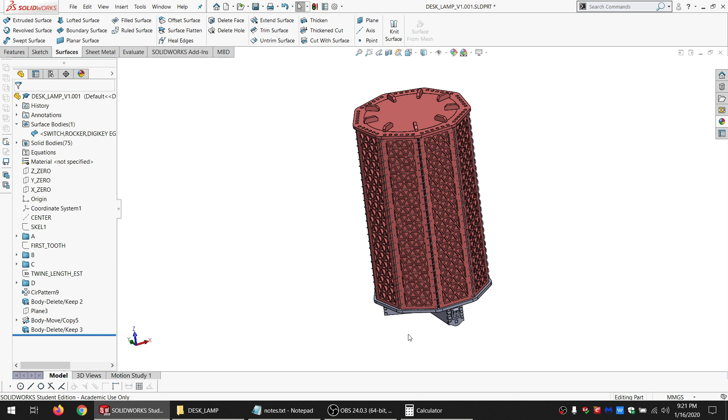Okay, back to it. Didn't do much since the last recording. I did do one minor thing: I went to the source file for the switch and added a body surface that's the size of the recommended cutout.

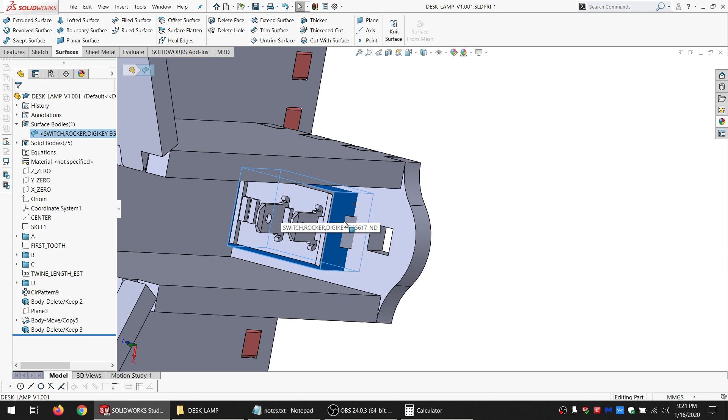So I'm going to use that to make the cutout for the switch. Just going to convert the two on the sides, and then I can draw on the other two because it's hard to actually see those other two.

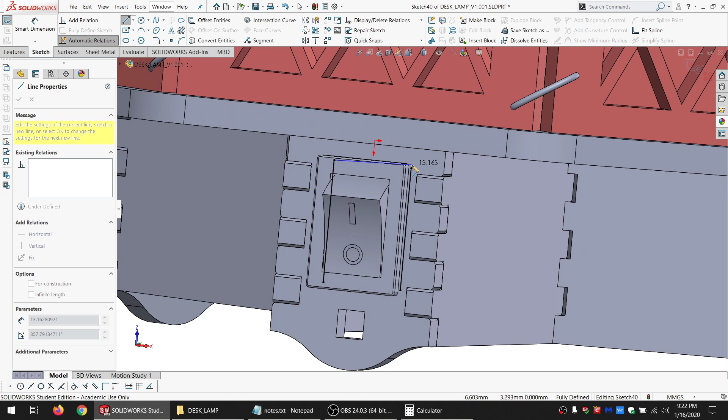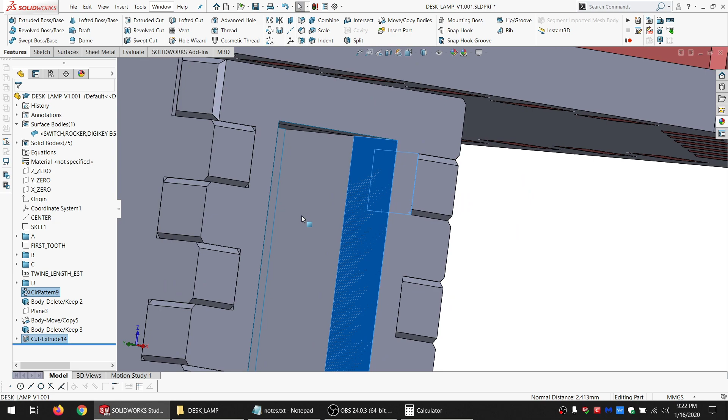Alright, since it's kind of a small spot, just want to confirm that there's at least some material left over here. So, a little bit under what I'd ideally like, but I think it should be okay given the location.

All the weight is going to be basically on these two. These are more for locking it together, so I'm not too concerned about that. I think it should hold. And I'll get rid of that body because I don't need it anymore.

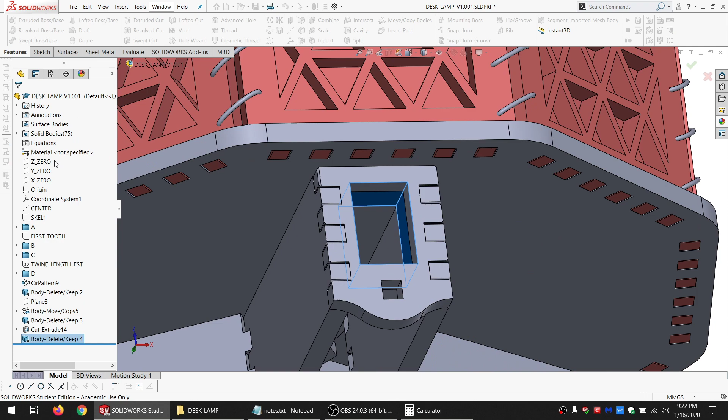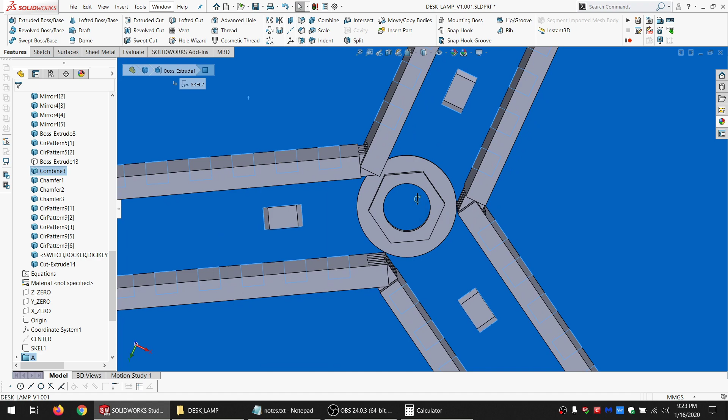Alright, so I don't remember if I ever made a hole for this to come through. I don't think I did. Yeah, there's no hole there. So go ahead and put a hole through.

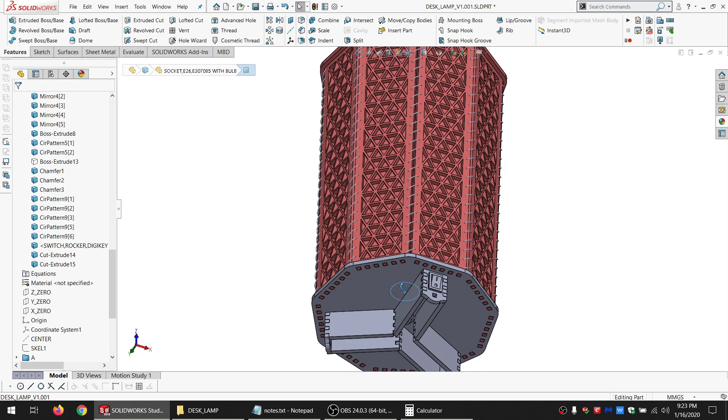And then what else do we need? So we need power to come in.

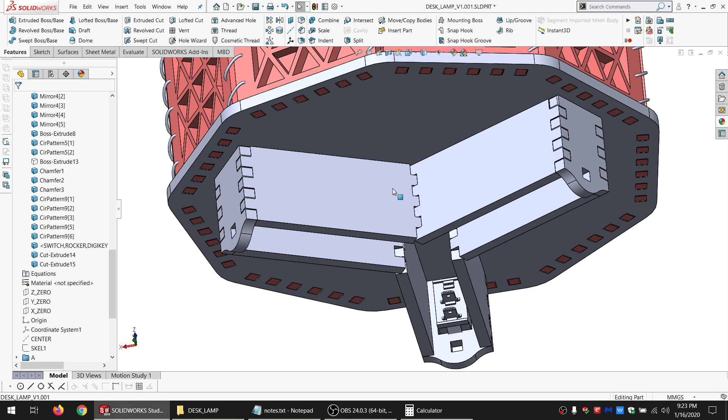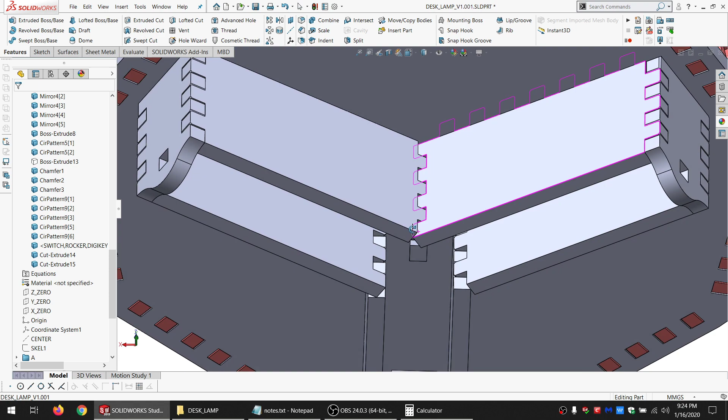I was thinking if it was like the power cord I had before, it had two separate leads that could have been divided—I could have made one hole here, one hole there, and made it symmetrical. But a lot of power cords are basically one outer covering with two covered wires inside of it, and dividing that up before it goes in is not ideal. It wouldn't look very good and kind of dangerous. Not really dangerous, but it would look dangerous.

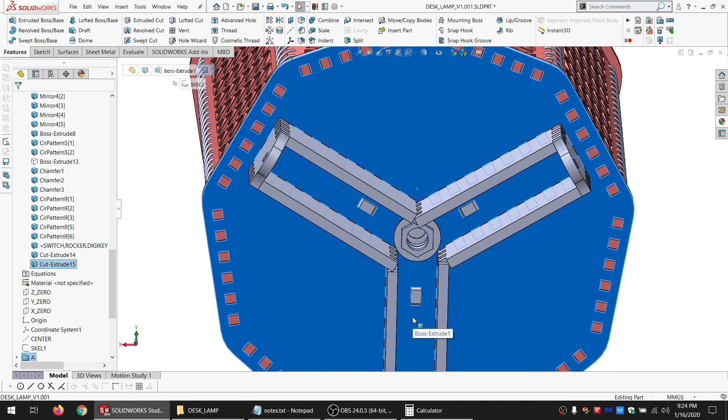So that means I need to think of something else. I could either put it in through here and route it back down, but that wouldn't make a whole lot of sense considering the setup here. Or put it in one of the end pieces, but then it's very far from symmetrical. So as much as I don't really like to do it, I think I'm going to put it right here. It'll be a little bit off of symmetrical, but it'll still be good enough.

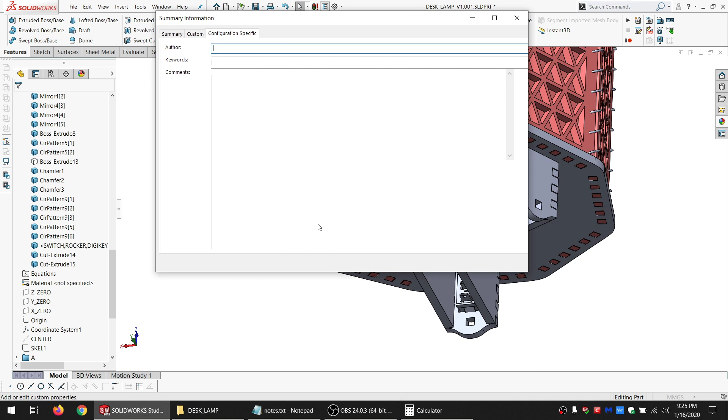I'm going to put in a couple variables because I haven't selected the actual cord I want yet. Power cord width, let's call it—I don't know, maybe 10 millimeters. You can always change it later.

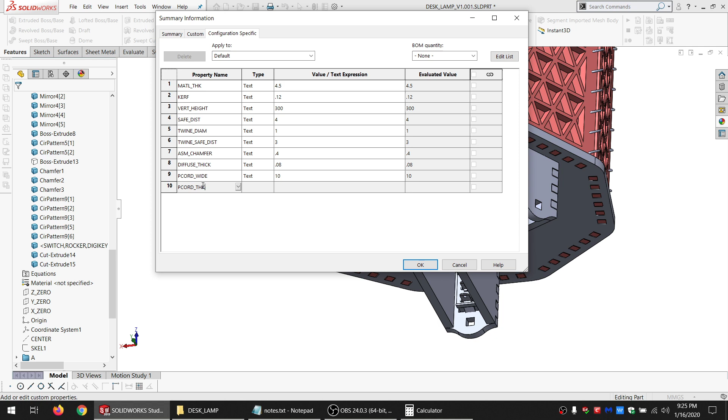Good enough, we can change that later of course. I'm just going to put in a rectangle for now to get those dimensions down.

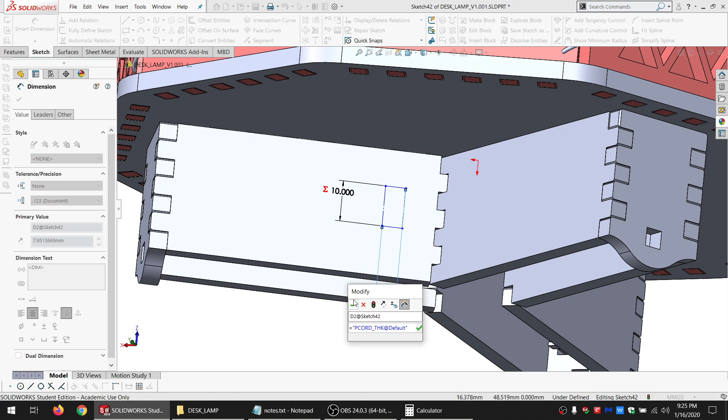Alright, I'm going to offset—doesn't matter really by how much because I'm going to change it here. Let me start locking it down. And if I can, I'd like it to be as centered as possible, even though it's not symmetrical, I can at least make it sort of centered.

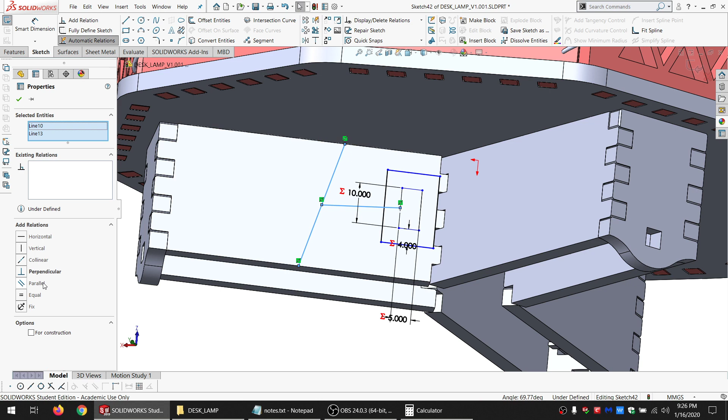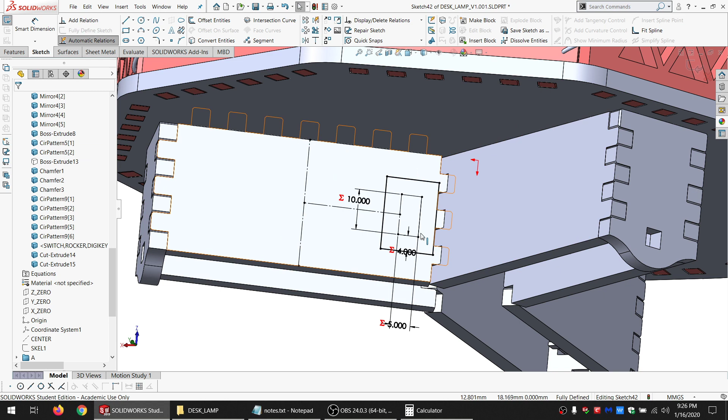This is midpoint. And that is also midpoint. I didn't want that to be midpoint, I wanted that to be coincident. There we go, all right. And this was actually all for construction, because I'm going to use a slot.

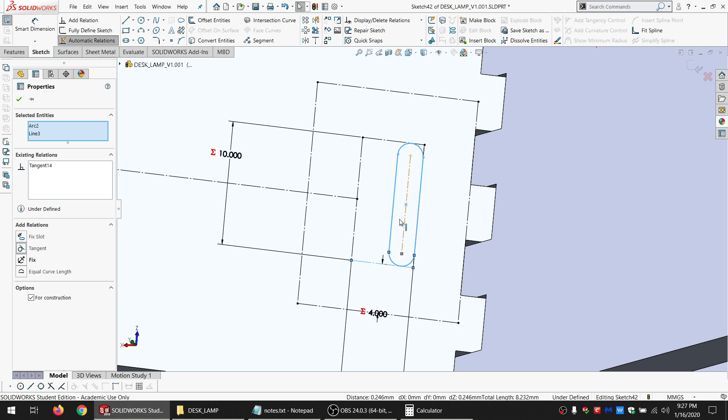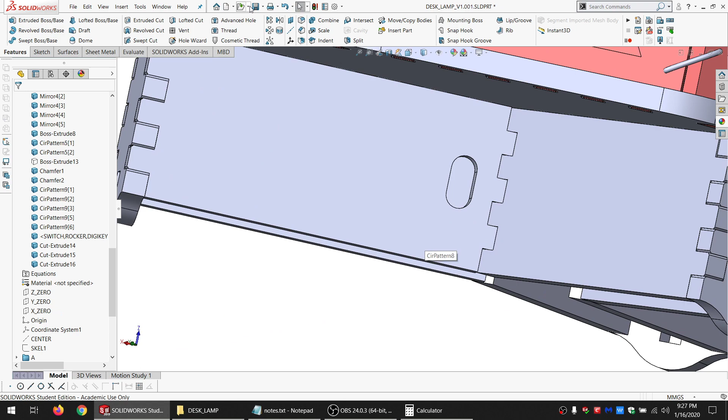Alright, so now we got a hole there. Can adjust it with variables nice and easy.

So power's coming in here. The neutral lead gets spliced, goes into the lamp. The hot lead goes through the switch, goes into the lamp. We've got a base plate that can go on.

So yeah, this whole assembly here, this whole bottom section including the base plate, kind of go together. Just trying to think of how this all ends up working together.

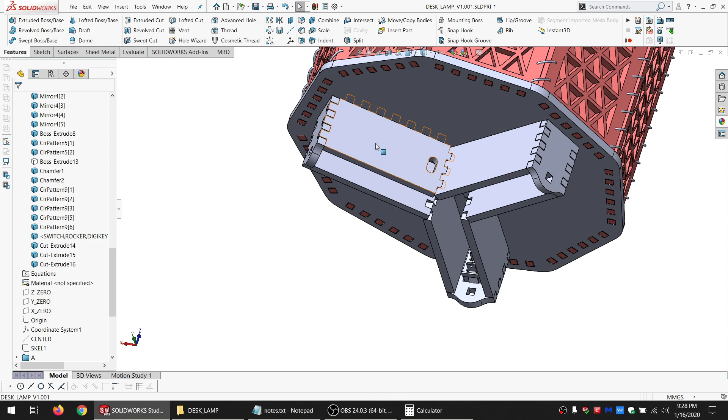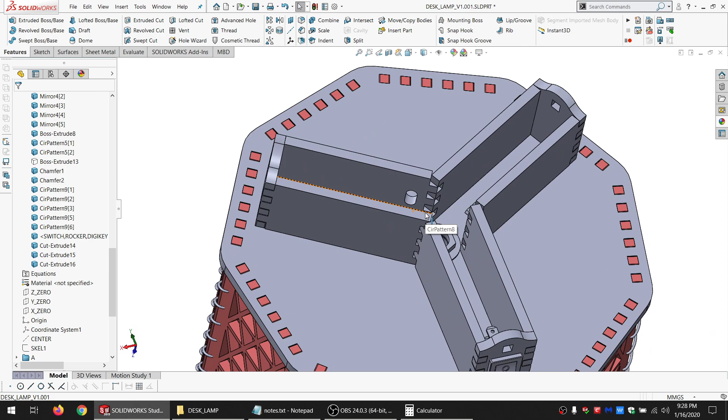So yeah, I think that should be okay. There's nothing connecting this to this other than friction, but there's a whole lot of little feet, and all together, especially once the moisture from the air gets in it and temperature changes and all that, this is basically going to be an interference fit, so it should be nice and strong.

Same with these that go through the whole surround for the light fixture. It's probably going to be pretty hard to get that through. Once moisture gets into the wood and all that, it'll be an interference fit, and you'll basically have to break the wood to get it apart, even without any glue involved.

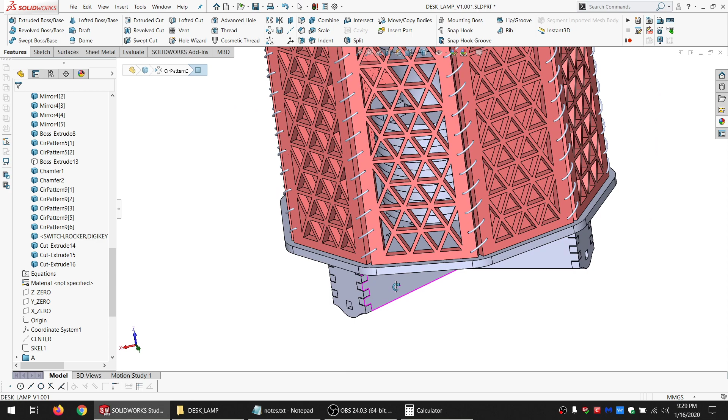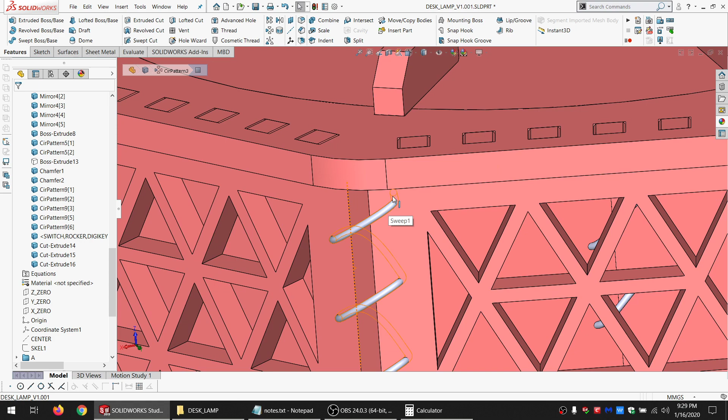Up here and at the bottom, these are less of an interference fit just because there's fewer of them and they're not as far apart. But they're still going to be pretty solid. I had been thinking maybe I'd extend this up and have it do a loop through, but I don't think that's going to actually provide any advantage.

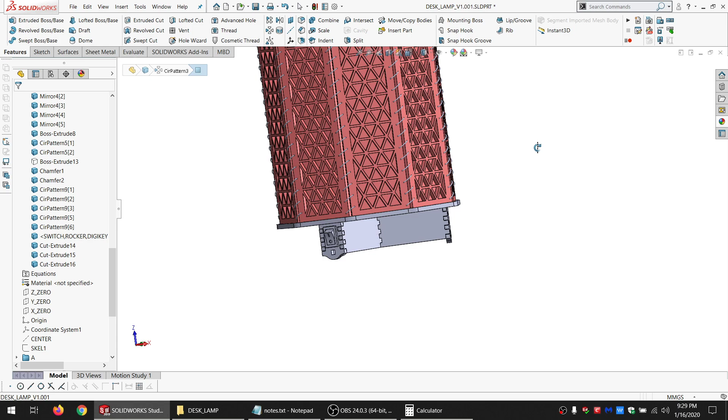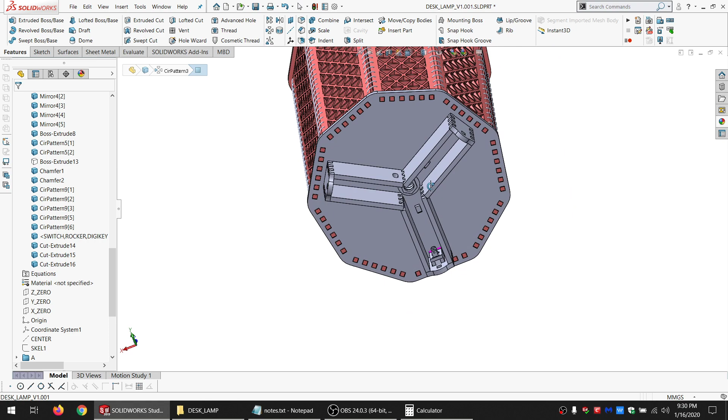At this point, I'm just trying to think of what else still needs to be done, because I'm not seeing anything offhand. If that's the case, then I basically just have to start laying this out and doing the kerf and the flat layout. Then I have to actually make one, make sure it works, and possibly have revisions from there. Yeah, I guess I should have made this part of the last video, but oh well.

So yeah, that's basically the design done, I believe. I'm still gonna look over it a few more times, and maybe I'll think of something else that needs doing. Could do an interference check real quick though, just because. I'm sure I'll get some interferences here, but we'll see how much of an interference I get.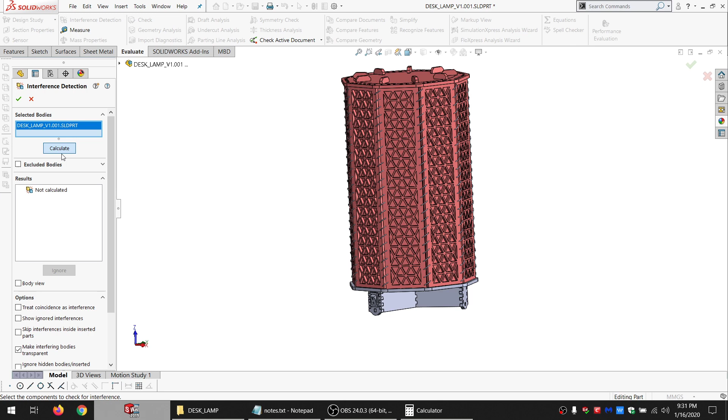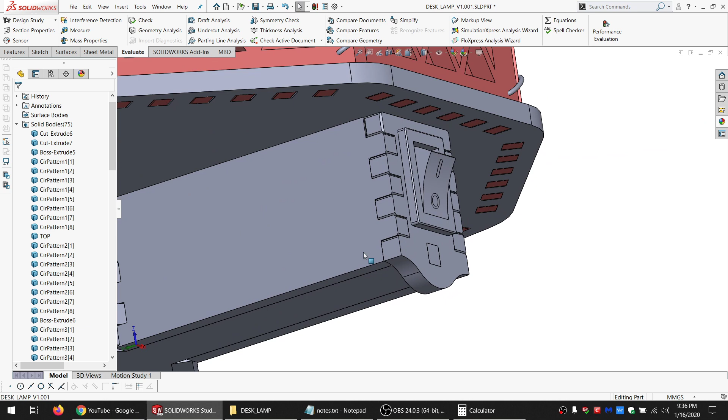Okay, did the interference check. Everything looked good, but while I was sitting there waiting on it, I was just looking at this, and I have issues with it. Basically, I want to just kind of close up these fingers, so this will press on there, and then they'll all press in together as one unit. Well, they already have to do that, but like I said, I want to close it up.

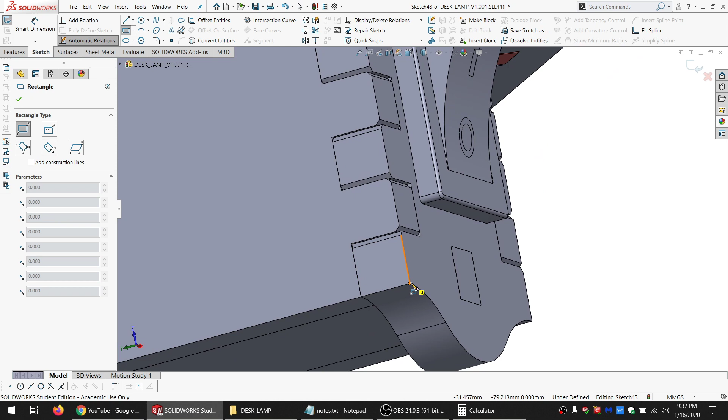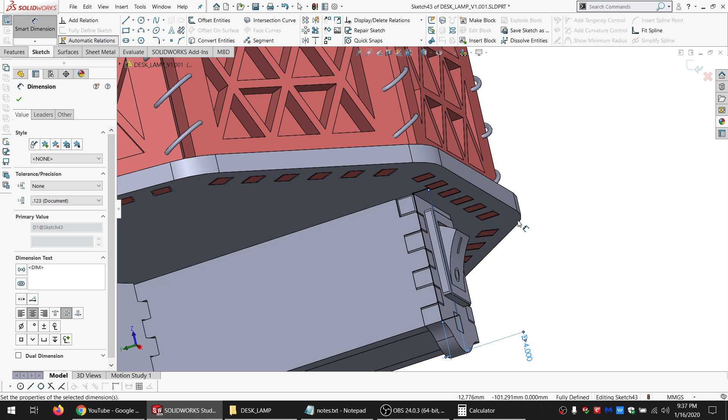So, yeah, start with there. I believe the first tooth is there. Make it a safe distance. And I'm going to have to fill in those because there's no, I don't want it to be chamfered anymore.

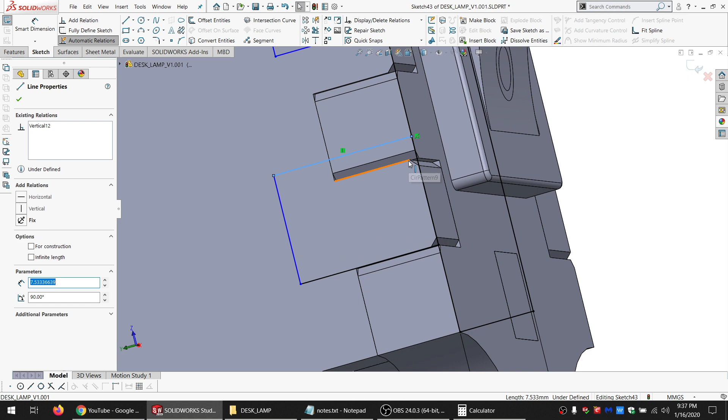I'd probably go back and actually manually get rid of all these chamfers when they were first created, but I can also do this. This is probably easier than trying to find them.

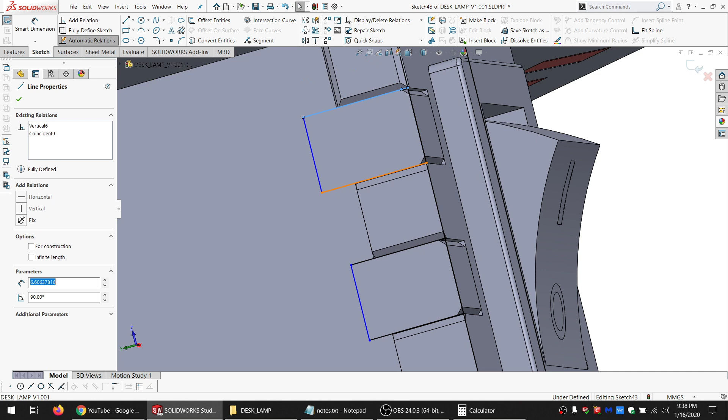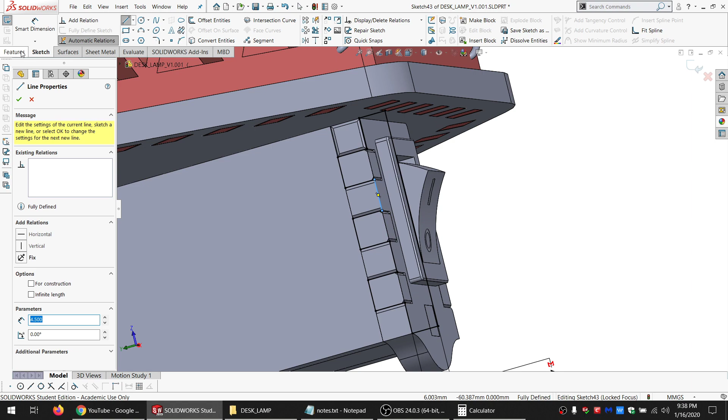So that's fully defined. Then I'm just going to make all this construction and bring these back, and then I'll just draw in the last lines. Okay, I can extrude that. So I need to hide this so I can see the other side. Extrude this up to here and merge it.

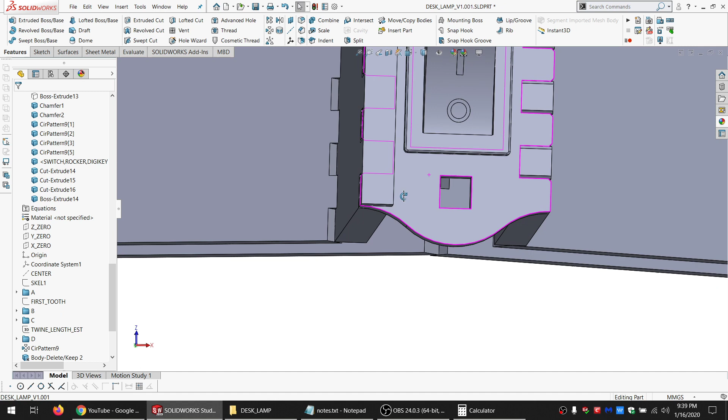And how do I like that? I don't. So we'll modify that again.

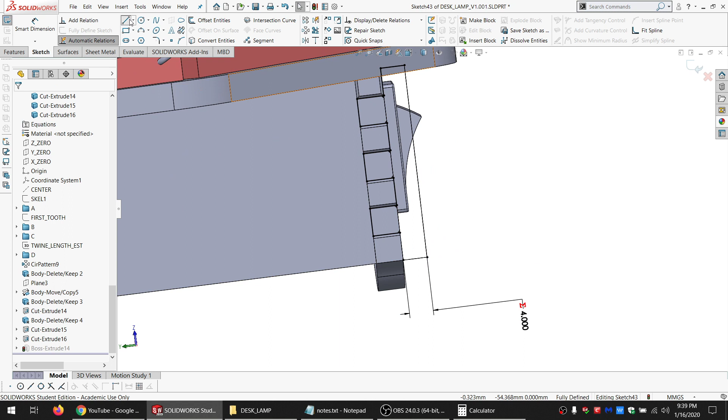So what if instead it started from here, went to there, like that, and we'll make this 45 degrees. How does this one look? Yeah, I like that better.

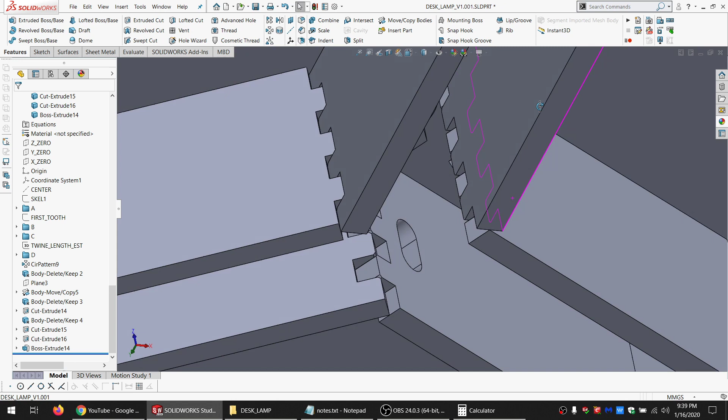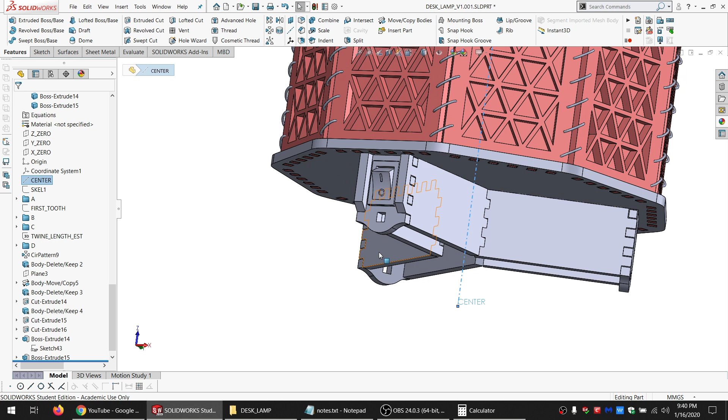So I'm going to reuse that same sketch, but this time I'm going to start from this surface, going to this surface, and just on that. Alright, I'm actually going to delete the unwanted extra bodies first, and then I'll do the pattern. Saves us a little bit of searching around later. So circular pattern, do a 3, already set. These two bodies, okay.

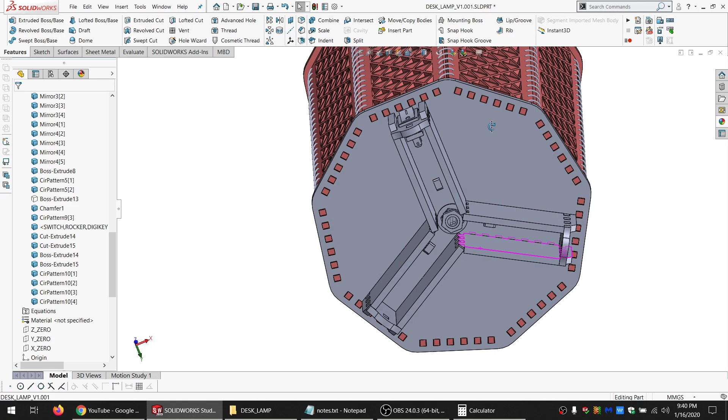And good, so now, let's see. We can kind of put all these 6 pieces together on a table, just sitting how they are. Then no, I'd have to put each of these 3 sections together. So 1, 2, 3, do it again and again.

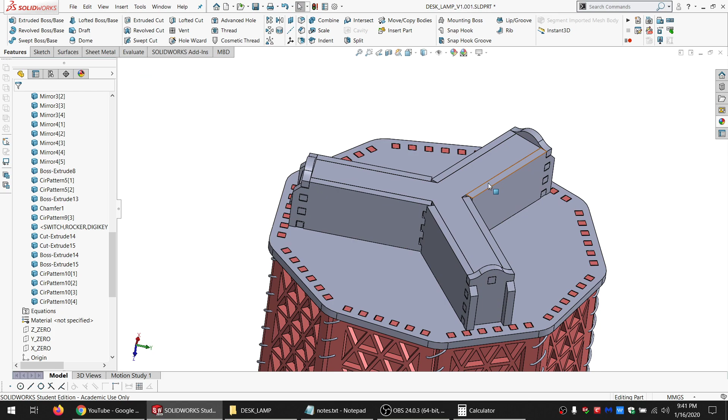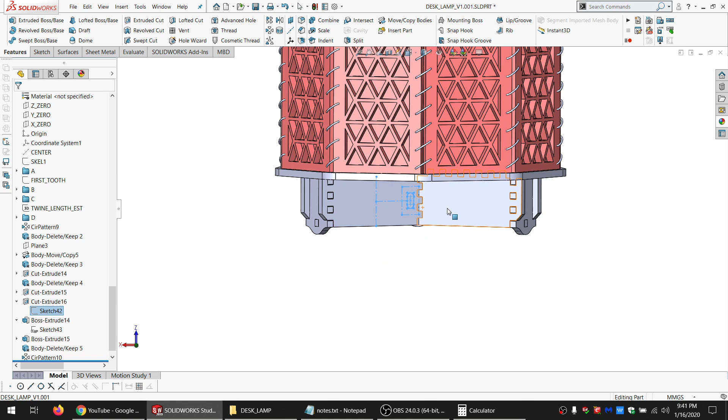And then I could put this plate into one of them, and then slide this one on, and then slide this on. At that point, I could slide in the switch, and I could slide in the power cord that I lost, so I need to find that again. So I want to bring this all the way down.

And yep, it's going to give me an error. That's fine, just need to make a couple modifications and it'll be good.

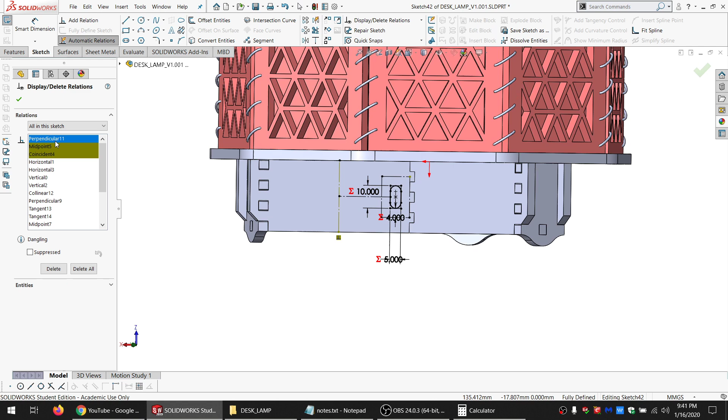So I'm going to go to display, delete relations, and just delete the 3 yellows. And let's see, so that'll be... okay.

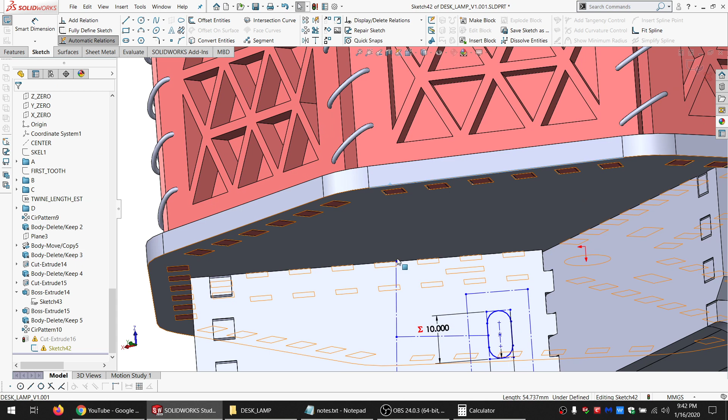This doesn't really matter where that comes from, so we can just use that. And we can use perpendicular to that. And from there, fully defined.

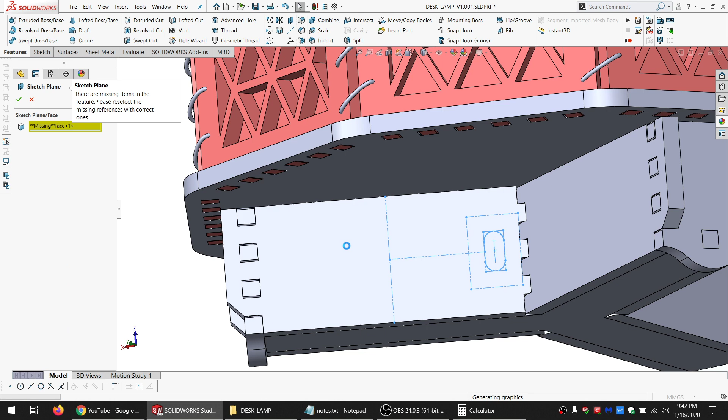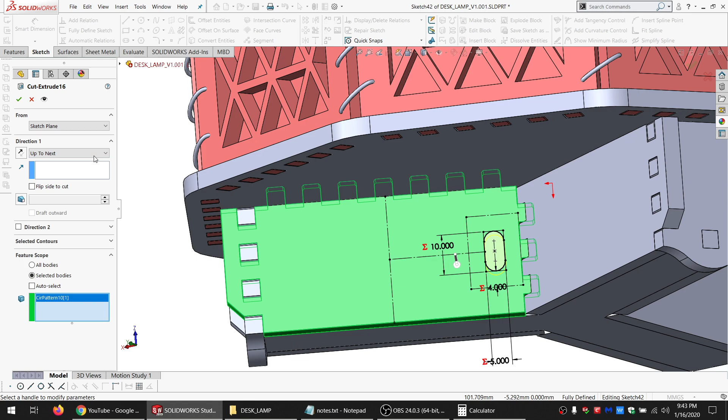It's going to give me an error again, because it doesn't know the face that it's on. That's fine, I want to be on that face. Probably give me another error, or it's still erroring. So I'm just going to go up to next and only on this one. Okay, so that's repaired. All right, so yeah.

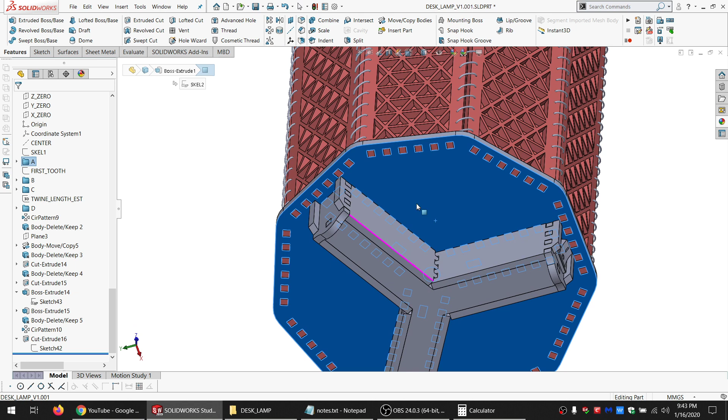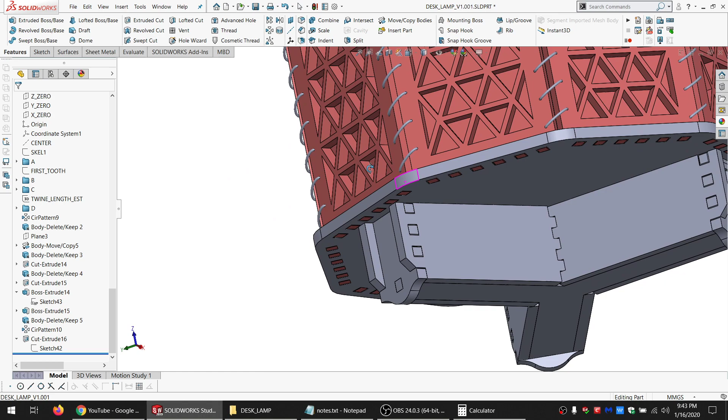Slide the switch in, slide the power cord in, wire them all up, put the socket holder into this piece here, run the wires through, connect all the wires. There's going to be plenty of slack at that point, and I can just shove the extra slack down this end or that end, and then push this up onto there. In theory it should basically just be a press fit at that point.

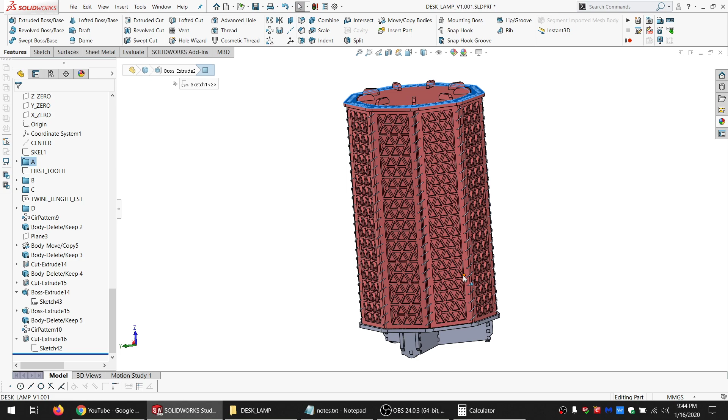Then the next step is I need to push these 9 side pieces down into there, at which point I can then also push this down onto the 9, and then it's a whole bunch of running twine, which will secure the diffuser plates. Those originally were a different color and something didn't quite go right, so I'm just going to remove all the colors, and if I want colors, I'll have to add them back in.

But yeah, that's pretty much designed. I still need to do the kerf and the flat layout, but I've already shown in previous videos that it'd be virtually identical to what I did then, and frankly it probably would make for some pretty boring YouTube, even by the standard of my channel. So...

I'm going to call this done. Maybe I'll make one more video on the subject, just a video of it being laser cut or something like that, or a quick shot once it's assembled. And if I assemble it and decide it's got some horrible flaw that I want to fix, there'll be more videos. But otherwise, I'll have to think of a new project for coming up.

I had some thoughts. I was thinking about possibly designing a really crazy huge laser cutter. That was one idea. The downside with that, aside from the pure cost of actually building a prototype, would be that I don't have room to build it.